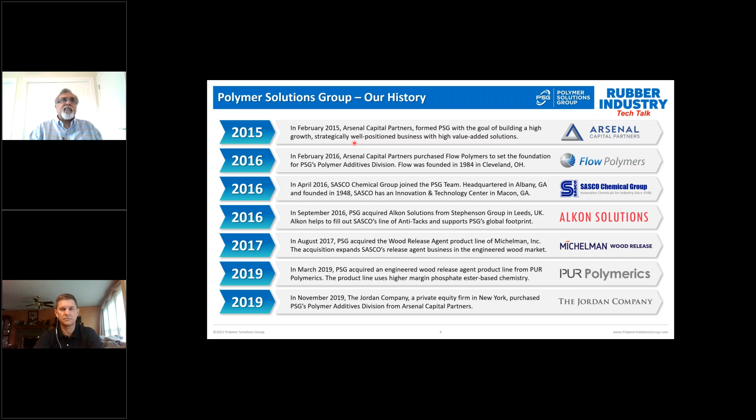So that's the makeup of our company. What are our products or product lines? For additives, we basically have three product lines. ProMix, which is, I'd say, used in nearly 40% of the tires worldwide. It's a homogenizing agent that is added to the inner liner to help improve processing and performance of the inner liner.

In addition to that, we've seen good growth outside the tire inner liner to different tire components. SureFlo is a product made with patented technology for plastics, especially for highly loaded polyamides or PET type plastics. So these were our mainstay products made in Cleveland.

And then in 2018, we started building a new line for a new class of process aids. We call them functional process aids. As we go through the presentation, I will keep emphasizing the word functional so you understand that this is a different type of material, and precisely why Aaron and his team were able to patent the technology and the applications.

SureMix is also 100% bio-based carbon, and that's why it helps rubber and tire companies meet their sustainability objectives. As we talk about sustainability, I want you to keep one thing in mind: it's also performance and profitability. Unlike many companies, we're not just focusing on one area, and I'll talk about that a little later.

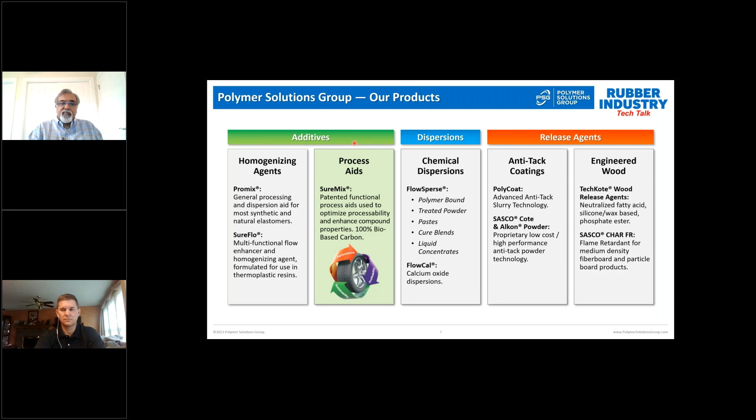So I'd used the word holistic a few short while ago. Let's understand what we mean by holistic. When we look at the rubber and tire industry, we're not focused just on one aspect. Either you're sourcing a green material, or you're producing a part with lower cost, or you're trying to optimize performance, or you're focusing on the mobility, the wet traction, the rolling resistance of the tire.

Our SureMix product line is designed to impact all 5 areas that I've mentioned: sourcing, manufacturing, performance, profitability, and mobility. And it's also very well aligned with the sustainability and performance goals and aspirations of our customers.

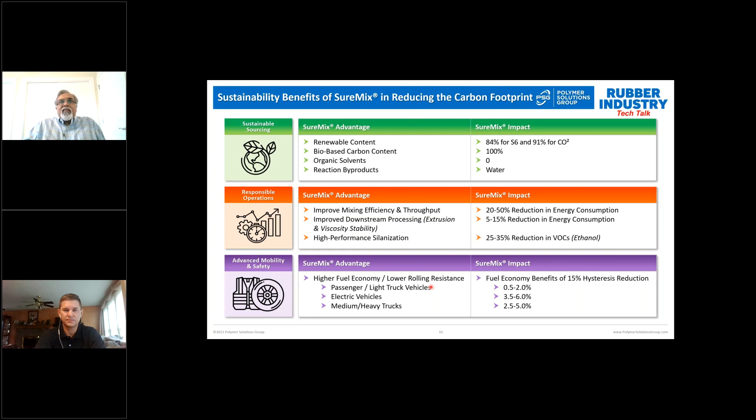So let's move on to understanding SureMix. It's a real challenge when you bring something new to a well-established industry. I remember back in '93, I was working in oil and gas, and I got a call from a carbon black company and said, 'Would you like to join us to make a silica-like carbon black?' And I go, 'Why?' They said, 'There's a patent out from Michelin, and we are really worried that in 2 to 5 years, nobody will need carbon black. This stuff is amazing.'

Well, we're sitting here in 2022, and as you all well know, silica is growing, but there's still a lot of carbon black used. The point is, it takes a lot of time to drive change. What we're trying to do is shorten that cycle by helping people understand what our product is and how it's positioned in the market.

So let's talk about the product. It's a functional process aid. The best analogy I can give you is if you think of solution SBR and functional solution SBR, there is a functionality added to the polymer so that it can improve performance.

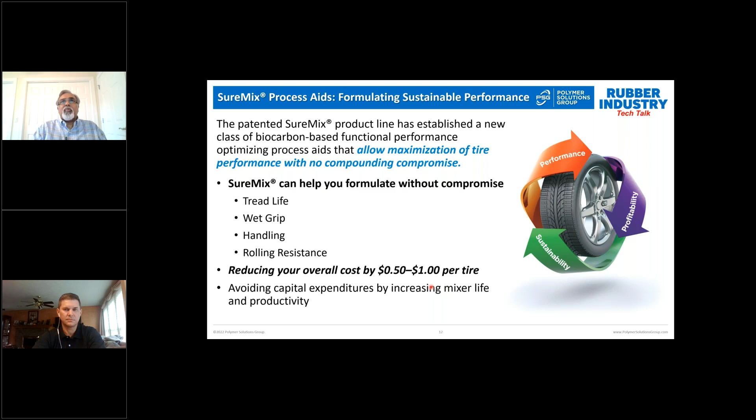But there are problems. It's difficult to mix 100, 120, or 140 pHr of silica. The viscosity of the compound increases significantly. There's also a performance penalty—as you increase silica, you also increase hysteresis. So how do we address that? We took the formulation which had 100 pHr of silica and added 5 pHr of SureMix. On the next slides, Aaron will walk you through the property changes on the processing side and then on the performance of the compound.

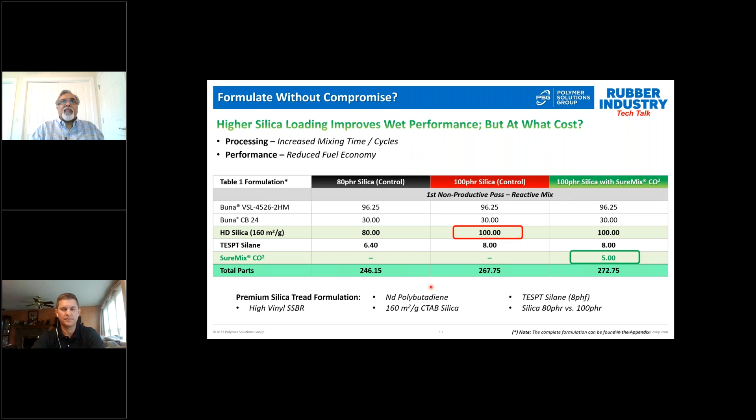Thank you, Ricky. Right, so you can see in this compound, increasing the silica loading from 80 to 100 parts. For those who've tried to do it, one thing you'll know is that it's very difficult from a processing standpoint, but the performance gain is incredible. Going from 80 to 100 parts of silica, the wet traction improvement is very substantial. So this is something everybody would like to do in a tire tread, but it's extremely difficult in a manufacturing environment.

So you can see if you look at uncured G prime, and we use uncured G prime on RPA - we usually talk in those terms as opposed to Mooney viscosity, simply because the RPA is very sensitive and we can see changes that sometimes won't show up on Mooney viscosity alone. But you can see the increase in the uncured G prime, increase in the viscosity going from 80 to 100 parts of silica in the black to the red bars on the top left here. So it's a 45% increase in the viscosity of the compound.

Using SureMix in that 100 part compound, we're able to reduce that viscosity by 40%, bringing it down very close to the viscosity of the 80 part silica compound. Also important is the stability of that viscosity.

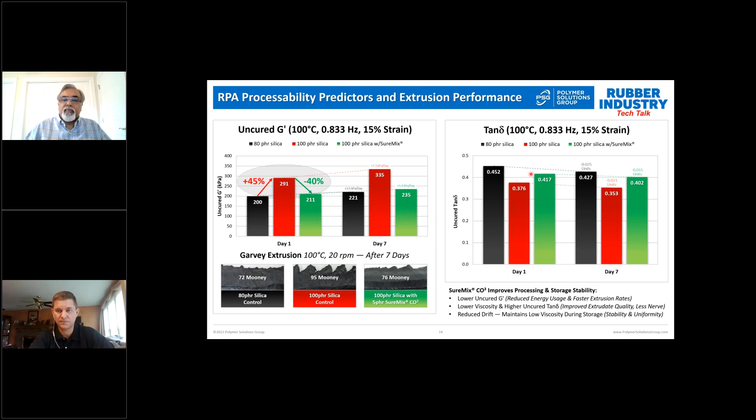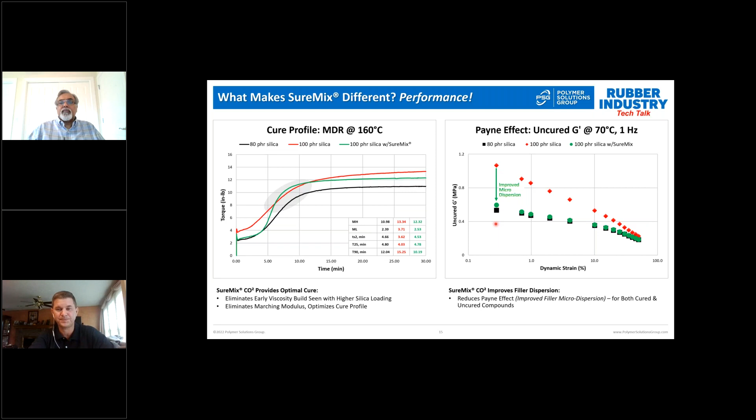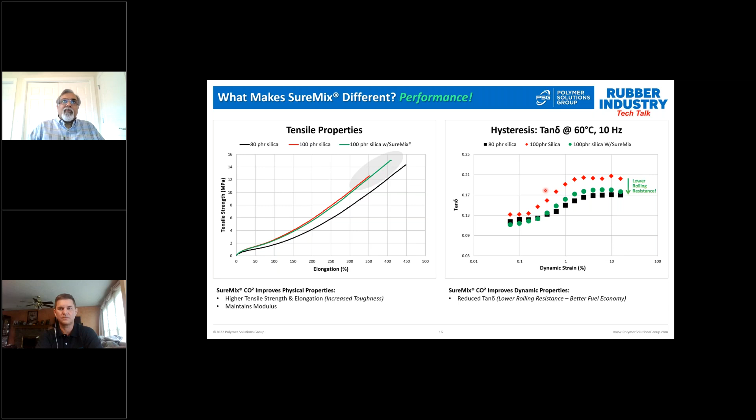So we'll close out this section by reiterating that we are very responsible in our sourcing and manufacturing. We have two commercial grades right now, S6 and CO squared. They're both designed to function slightly differently. S6 is more used in carbon black applications, and CO squared more in silica, but they can be used together.

If we look at the EPA Green program, we have applied 8 of the 12 green principles in manufacturing SureMix. The other 4 don't apply to the type of product we make. Some key ones, as mentioned earlier: it's a low temperature process, we do not use solvents, and we have water as a byproduct, so we're not disposing of hazardous materials.

So now we'll move on to another section focusing on another aspect of performance and sustainability. We'll look at two examples here: I'll cover mixing cycle optimization, and Aaron will cover VOC reduction. At the end of the section, we'll help you estimate the impact on greenhouse gases.

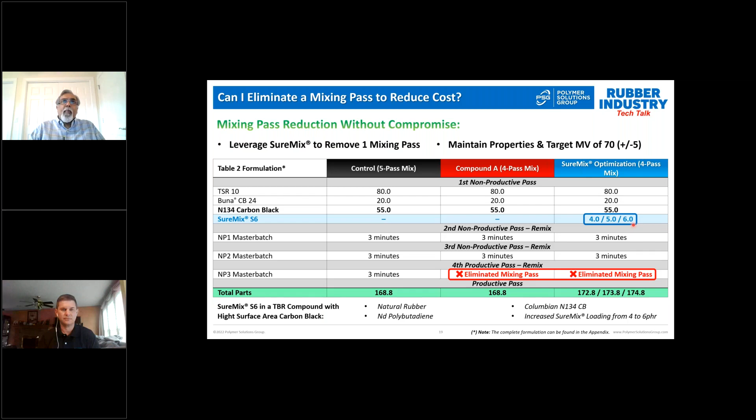So as you can see over here, everybody looks at Mooney, which is fine. You can see an increase in Mooney as one pass is taken out, as you go from 5 to 4 pass. And when SureMix is added, you can see again a drop in Mooney. These are all 4-pass mixes.

We prefer to look at G prime, and G prime is more sensitive. It's important to note that while we saw 69 Mooney for the 5-pass control and 4 PHR SureMix, we see a lower G prime, 221 versus 207. But if you look at the 6 PHR, we've gone from 221 to 188, or from 229, a reduction of 18% to 188 kilopascals. So a significant reduction in G prime.

So our work in the lab, and then further in the plant, was to focus on the 4 PHR mix, take baby steps rather than a leap of faith, and try to save as much mixing time as you can. We do have customers who have taken 2 mixing passes out in some silica compounds, taking full advantage of the viscosity reduction of SureMix.

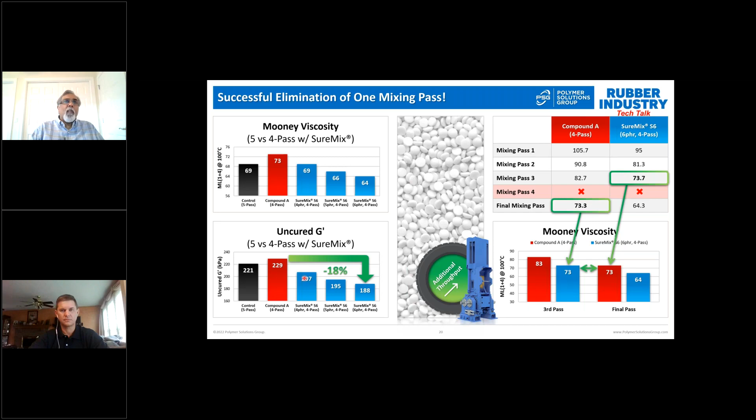So let's look at the physical properties. In this case, up to 4 PHR, we saw no change in the tensile curves. The tensile strength and the elongation to break, and especially the modulus, remained unchanged. We also looked at the dynamic properties, E prime and E double prime, and we found no change in those. So in other words, the properties were unaffected, but the processability was significantly improved, allowing the customer to eliminate 1 mixing pass.

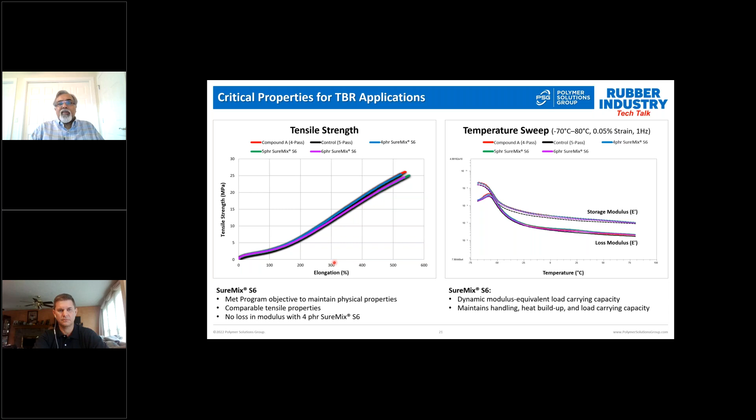So this is what we call high performance silanization, and let me give you a little bit of background before I jump into the data. So when you think about use of silane in a silica compound, in a silica tread, the majority of the work that was done to establish silane loadings was done obviously many years ago, and was done using Si69 type silane, so tetrasulfide type silane, and it was done within the bounds of processability.

So what you'll see is a typical recommendation of 8 parts of silane per 100 parts of silica, and that was based on what properties could be developed during mixing, within a mixed cycle where you could get compound that was processable, right? So that was kind of the box that was being worked inside of.

So what we looked at, as we were considering the dramatic processability improvements that we get with SureMix, we thought: was there an opportunity for 2 things? One, was there an opportunity to do silanization in the mixer at a higher temperature using SureMix? Basically buying a processing window at a higher temperature because of the improved processing with SureMix. So we would want to do that because by going to a higher temperature, you can drive the silanization reaction. And in doing so, you can get better silica dispersion and a further reduction in hysteresis and improved fuel economy.

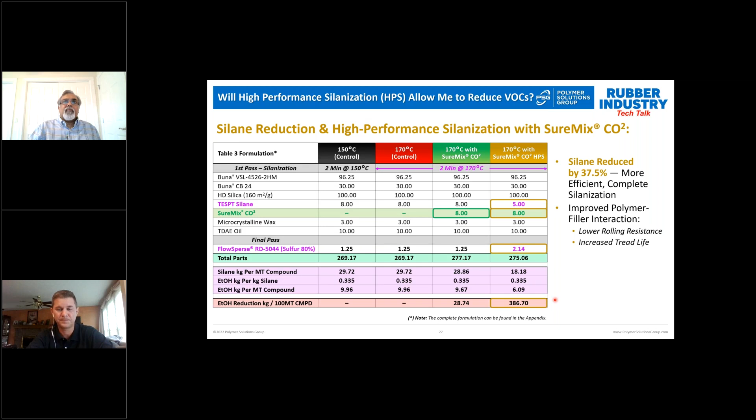Okay, if we look at the processability of these compounds, again, we're looking at RPA, uncured processing. You see the increase in the viscosity going from 150 to 170 degrees C, from the black curve to the red, from the black bar to the red bar, and you see the decrease in the viscosity using SureMix CO2.

In the green bar at 170 degrees C, and then with the reduction in the silane, you also see that nice low viscosity. So in both cases, using SureMix CO2, whether it's at the control level of silane or at the reduced level, you see a viscosity that's lower than the control compound, even though we're processing and performing silanization at 20 degrees higher temperature.

And you also see the drop in the uncured tangent delta going from 150 to 170, and what that tells you is it's going to be a rougher extrusion, which you see below. And then you see the increase in the uncured tangent delta as we add SureMix and reduce the silane.

Now the Garvey die extrusions in this case show a lot. Going from 150 to 170 degrees C, you see the compound roughness. You see those numbers above, those are actually the Mooney viscosities.

In the case of the 170 degrees C compound, 82 was the compound viscosity as mixed, and an increase to 103 after 7 days storage at room temperature. The compounds containing SureMix maintain viscosities down in the 70s, very close to the 150 degrees C silanization control.

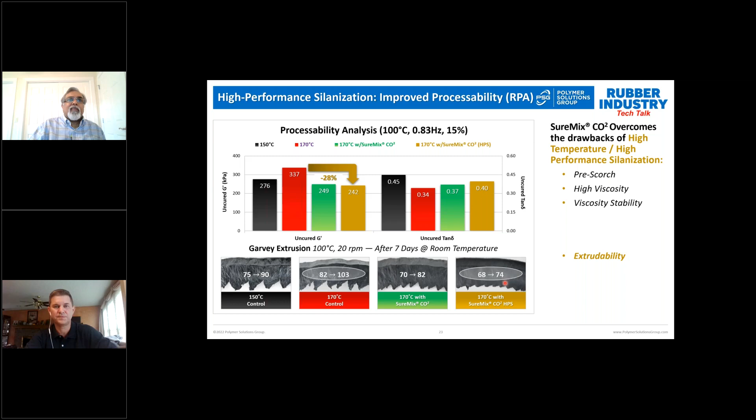Great point, Ricky. Thank you. Thank you. So we'll move on to the properties.

Okay, so using the higher temperature silanization. I mentioned that what happens is you're going to drive the reaction, and improve the dispersion of the silica.

But in the case of the control compound, you see going from the black to the red on the left. If you look at the tensile, you see an increase in the modulus for all of the compounds at the higher temperature, and that's due to the liberation of the sulfur from the tetrasulfide due to the higher temperature.

But for the control, you see a big drop in the tensile and elongation. So what's happened there is you've gotten pre-scorch, some pre-cross-linking in the mixer during processing. And as a lot of you know, if you continue to mix while your compound's starting to cross-link and pre-scorch, you're going to tear the polymer, reduce the molecular weight, and lose ultimate properties.

You see the two compounds with SureMix CO squared, the green and yellow curves. We're able to protect the compound during the higher temperature and get very good tensile and elongation development. Of course, the whole goal of going to the higher temperature was to drive the silanization reaction and improve the hysteresis and fuel economy of the compound.

So you see going from the black curve to the red curve on the right, the hysteresis by DMA, you see that reduction in the hysteresis. If you could do that in production, if you could mix that compound, you would do it because that's going to be a benefit in your tire. You're going to see improvement in fuel economy in those tires.

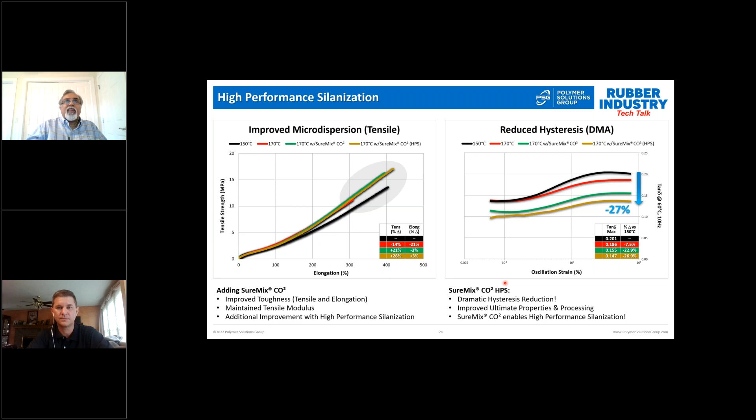So to reiterate this section, our goal over here was to set the new benchmark on rolling resistance. And you can see that was achieved just by making slight formulation adjustments, the addition of SureMix, and optimizing the mixing cycle. So the previous example was on mix cycle reduction. This was on silane reduction. So how do these affect your sustainability goals?

So let's look at mixing and processing efficiency. The feedback that we have at the factory scale is a 20 to 50% reduction in energy consumption in the internal mixer. That is driven by two factors. One is fewer mix cycles, especially highly loaded silica compounds have to be milled multiple times to get the viscosity in an acceptable range and get the micro dispersion to an acceptable level.

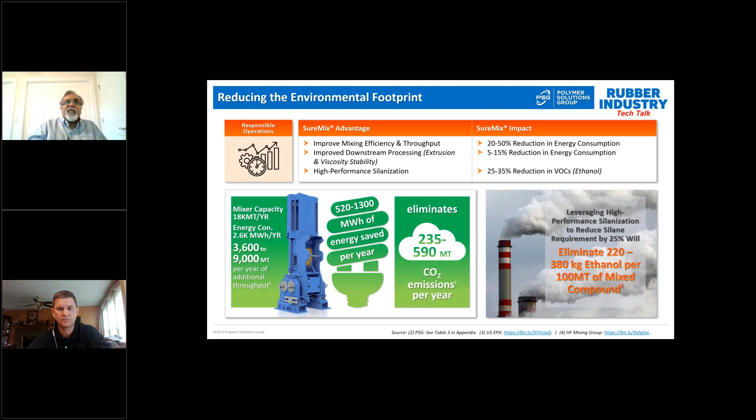So what we've covered so far is the state of the art where we are today, but we'd also spoken about future aspirations and setting the benchmark. So let's look at what SureMix can do to help you further down the line, especially from a performance standpoint.

If you're familiar with the new generation of tire compounds, the industry is moving from solution SBR to functional solution SBR or blends of those. So in this study, what we wanted to do was compare the benefits from moving from a solution SBR to a functionalized version of the same polymer. So we took two polymers, Sprintan SLR 4630 and 4633, which had very, very similar microstructure. The main difference is one has functionality and the other doesn't.

We also looked at the impact of SureMix in these formulations. So we took our solution SBR control and added 6 parts of SureMix. Here again, we have 100 PHR of HD silica and the recommended 8 PHR of the filler of tetrasulfide silane or Si69. Similar approach on the functional polymers: 100 parts of silica, 8 of silane, and then added 6 PHR of SureMix CO squared.

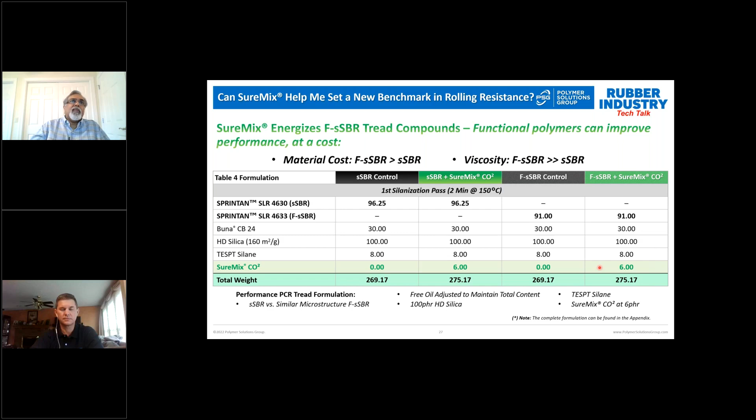So let's look at the Mooney viscosity to start with. If we take our true control for the study, which is the black line, that had a Mooney viscosity of 85. As expected, when you add SureMix, the viscosity falls to 73. If any of you have mixed functional polymers, you know one of the big challenges with these polymers is the increase in Mooney viscosity or G prime, so it increases from 314 to 331. Adding SureMix again drops it down to 265.

What is really interesting to me is if I look at the Mooney viscosity of the functional polymer with SureMix, it's lower than the control. In other words, it should mix and process better than the control without SureMix, which is quite unusual when you're using functional polymers.

Similarly, if we look at the uncured tan delta, we should see similar performance between the control on extrusion smoothness within the functional polymer. The fact that the viscosity is lower also plays to the benefit of the functional polymer with SureMix.

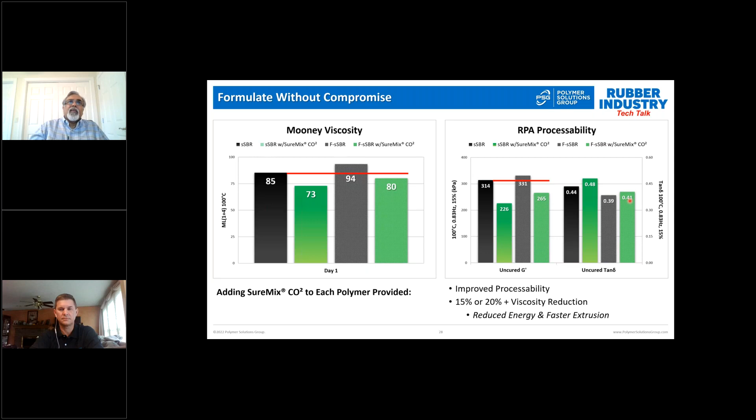So let's focus on the left. Why are functional polymers used? They're expensive, they're difficult to mix, so why use them? Simply because they help improve tire performance. In this case, if you're measuring hysteresis, going from the black line to the gray line.

So the question comes, is there a better way to achieve that same hysteresis reduction? And the answer is yes. If you just take the solution SBR, add SureMix to it, you'll have the lowest viscosity of all the compounds we've looked at in this section, and hysteresis that's even lower than the functional polymer. So you get the best of both worlds. You get the performance targets and the ease of mixing and processing.

Furthermore, since the compound has 6 PHR of SureMix versus 100 of a functional polymer, there's a dramatic reduction in compound cost, as well as compound stability, because functional polymers can have quite an increase in viscosity on storage.

But if you want to set a new benchmark, especially for vehicles like electric cars, where charging takes, if not hours, at least 30 to 40 minutes for a full charge, people want to extend the battery range. In those cases, you want the lowest possible hysteresis achievable. If you take the functional polymer and add SureMix, there's a further 5% reduction. So all in all, using functional polymers with SureMix, we can reduce hysteresis by 14% and increase the fuel economy or mileage of a battery electric vehicle per charge.

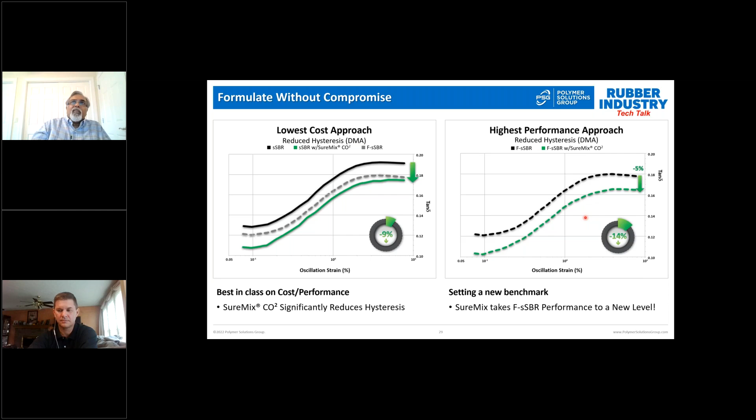If we look at how a 15% reduction in hysteresis can affect the tire's fuel economy, in the case of a passenger car or light truck, where the tire contributes approximately 4% to 12% of the energy dissipation, reducing the hysteresis gives a fuel economy improvement from half a percent to 2%. When you get to electric vehicles and trucks, the impact is even more significant, because these vehicles have less energy dissipated through engine heat. Most of the energy is dissipated through overcoming air resistance, the coefficient of drag, as well as rolling resistance. So any improvement in rolling resistance has a larger impact on the fuel economy or the distance a car can travel per charge.

If you look at the information published by the EPA, a 1 to 2% increase in fuel economy equates to about 18 million metric tons. So the corporate average fuel economy has a dramatic impact on the greenhouse gases generated. This is just in the USA, not a global number. Based on the cars on the road, a 1 to 2% fuel economy improvement eliminates 18 million metric tons of carbon dioxide.

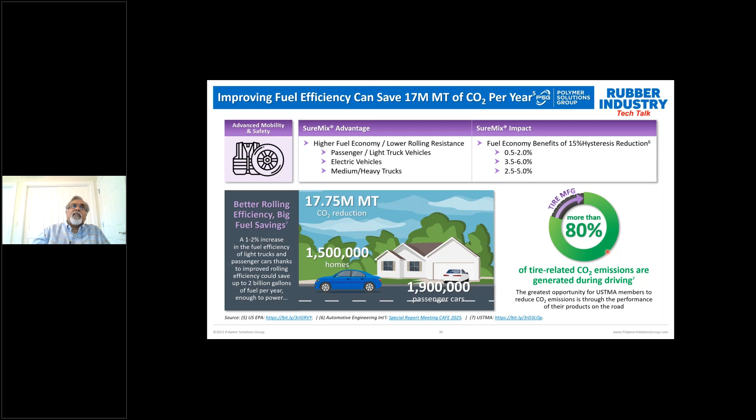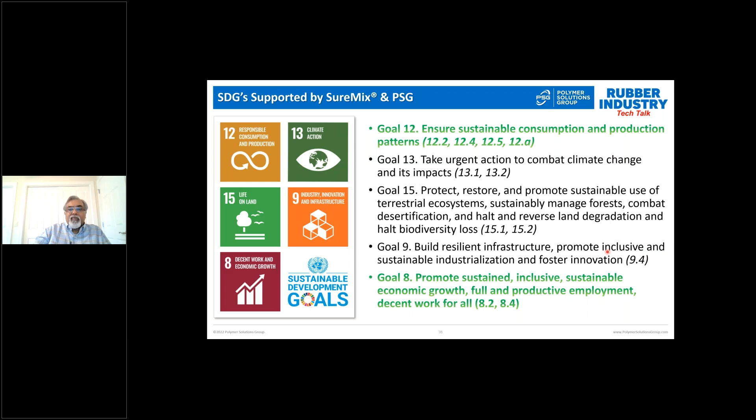And finally, if we were successful today, we hope we demonstrated that sustainability is no longer an option, it is a requirement for the rubber and tire industry. We are all responsible for helping reduce the carbon footprint, and many companies, whether automotive, tire, or rubber products, are setting goals to be carbon neutral by 2050. We hope with the help of SureMix we can help you achieve those goals. We also illustrated how sustainability is not mutually exclusive from profitability and performance. This product line can help meet both your profitability and performance targets by reducing the cost to manufacture and setting the benchmark on performance, especially things like hysteresis and wet traction, where SureMix is an enabling technology. And finally, we now have an option which will allow our engineers, designers, and compounders to formulate without compromise.